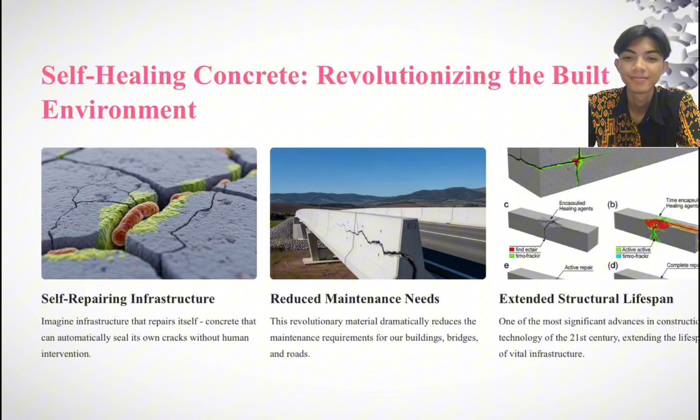Next, why do we need self-healing concrete? So why do we even need concrete that heals itself? Well, regular concrete cracks all the time. It can be from things like temperature change, heavy traffic, or just age. And fixing those cracks isn't cheap. In the US alone, we spend over $18 billion every year just on repair.

And it's not just about money. Cracked and aging concrete can be dangerous. When infrastructure starts to break down, it puts people at risk. Since we use more than 4 billion tons of concrete worldwide each year, finding a stronger, longer-lasting solution has become a big priority.

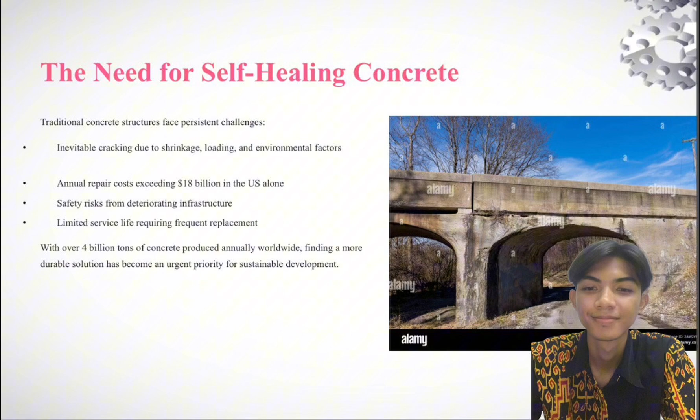Okay, next, what is self-healing concrete? So how does this amazing concrete actually work? Self-healing concrete is designed to fix small cracks on its own, kind of like how our skin heals a cut. When tiny cracks form, too small to even see, the concrete reacts and starts healing them up without anyone having to do anything.

This stops little problems from turning into big ones and keeps the structure stronger for much longer. It's a smart and nature-inspired solution that could totally change the way we build.

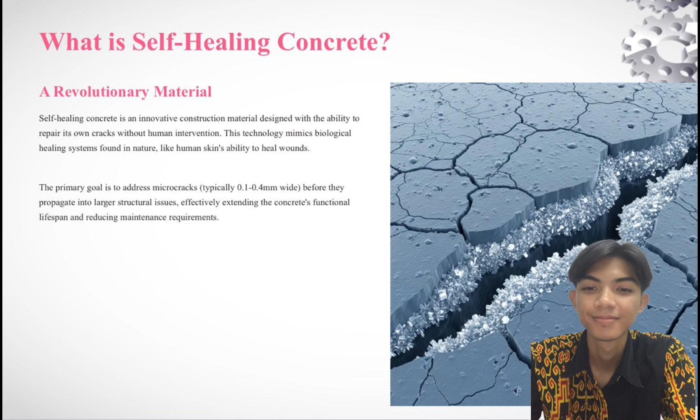Second, autonomous healing is different. We plan for it from the start. We embed special agents, chemical, mineral or even bacterial, that stay dormant until a crack appears. A trigger such as air, moisture or a change in pH wakes them up so they can patch wider, harsher cracks than autogenous healing can handle.

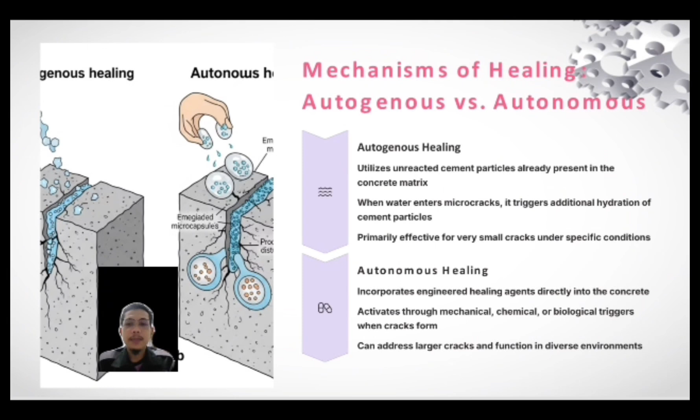Okay, this slide is autogenous self-healing. Let's zoom in. Concrete naturally wants to heal itself, but only under the right conditions. First, it needs moisture: rain, humidity or groundwater. Second, unreacted cement hydrates again, producing extra calcium silicate gels. Third, over time, calcium carbonate crystals grow and knit together cracks that are typically under 0.2 millimeters, about the thickness of a human hair.

The downside is capacity. Older or dry structures don't have enough free cement left to keep healing.

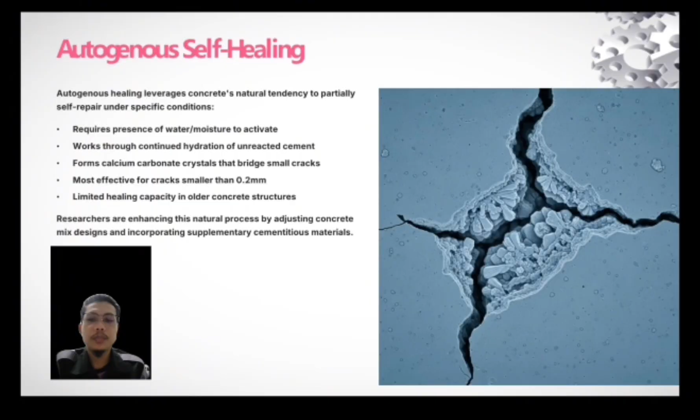Okay, the next slide is autonomous self-healing, or microcapsule technology. Here's the game changer. We embed microscopic capsules about 1/10 the width of a grain of sand, filled with liquid healing agent. Step 1, capsules lie dormant for years without affecting strength. Step 2, when a crack grows, it slices the capsule wall, releasing the agent exactly where it's needed.

Step 3, the liquid seeps in by capillary action and polymerizes, bonding the crack faces like a built-in epoxy injection. Because the trigger is chemical, the system is self-sufficient. No sensors, no maintenance.

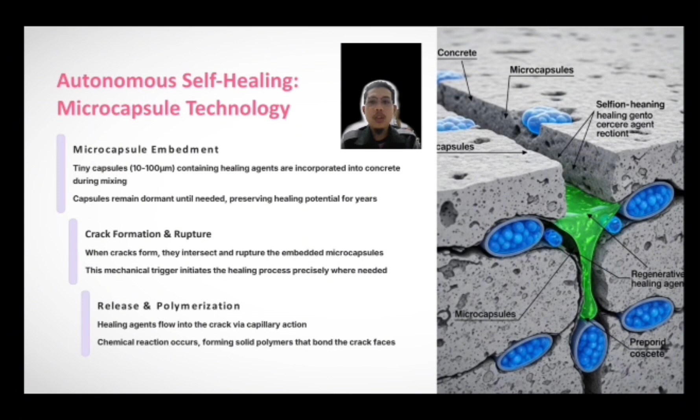Let's begin by exploring polymer and chemical healing agents, a critical component in the advancement of self-healing concrete technology. Modern self-healing concrete leverages several chemical agents to repair damage autonomously. For example, epoxy-based polymers offer excellent structural bonding and help reinforce the material. Sodium silicate is another key agent, forming calcium silicate hydrate to effectively seal cracks.

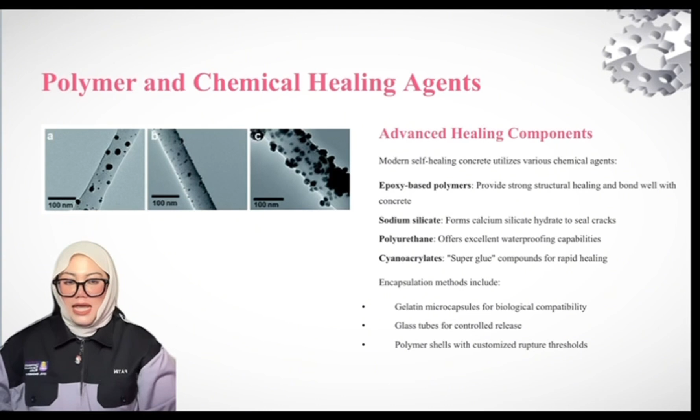Polyurethane contributes superior waterproofing, essential for durability in harsh environments, and cyanoacrylate, a superglue compound, delivers rapid healing of small fractures. To make these healing agents effective, we use encapsulation techniques like gelatin microcapsules for biological compatibility, glass tubes for controlled release, and custom-designed polymer shells that break at specific pressure points to release the healing agent. Let's look at the measurable impact of this technology.

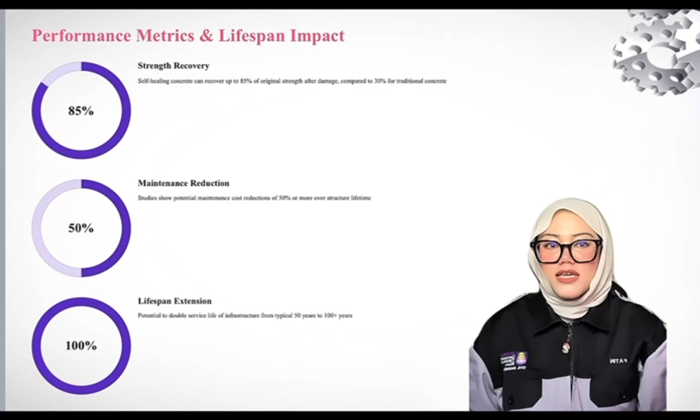First, in terms of strength recovery, self-healing concrete can restore up to 85% of its original strength after damage, far outperforming traditional concrete with typical recovery of only around 30%. Secondly, studies show maintenance costs can be reduced by 50% or more thanks to fewer repairs and fewer inspection requirements. And finally, one of the most exciting benefits, lifespan extension. With these agents, infrastructure can potentially double its service life, increasing from the standard 50 years to 100 years.

These concepts are not just theoretical. They are already being applied in real-world infrastructure. In the Netherlands, the A76 highway became the first major project to use bacterial self-healing concrete back in 2015. In London, trial sections of the Hungerford Bridge have been monitored since 2019 for their healing performance.

In China, the Jiangyin Yangtze River Bridge used the technology for underwater structural components, showing its versatility. And the Seattle light rail tunnel incorporated it for waterproofing in high stress areas. Reports from these projects show 30 to 40% fewer maintenance interventions in just the first 10 years, proving the value of this investment early on.

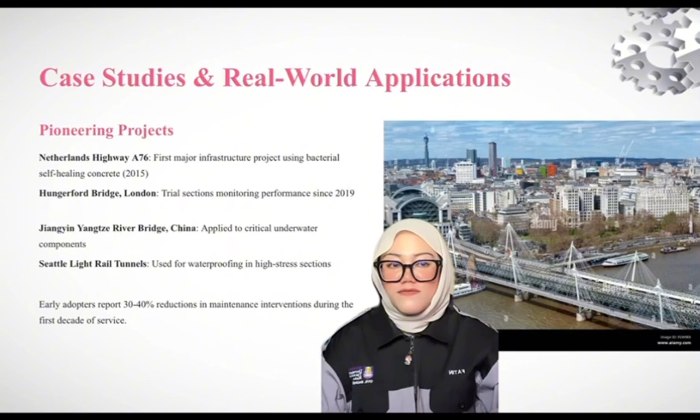I'm going to present about challenges. The first thing is technical challenges, and there are 4 points. The first one is ensuring long-term viability of healing agents. Next is protecting capsules during high shear concrete mixing, developing reliable testing and certification standards, and scaling production methods for industrial quantities.

Next is economic barriers: an initial cost premium of 20 to 35% over conventional concrete, difficulty quantifying lifetime economic benefits, and resistance from a conservative construction industry. The last one is research frontiers: multi-stage healing systems for repeated damage, integration with structural health monitoring sensors, and optimizing for extreme environments.